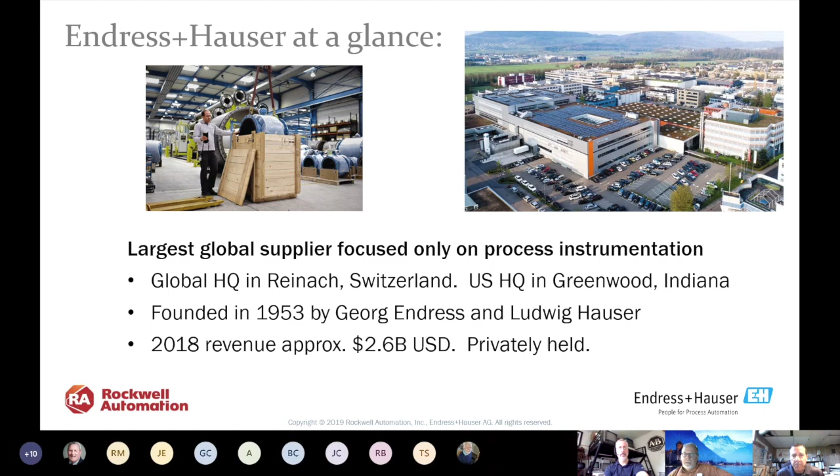So what is a strategic alliance? There's different levels of partnerships with Rockwell, and the alliance partnership is a top tier partner, and we're not really here to just sell product through the Rockwell distribution. We are still representatives, but basically the alliance is to bring together two corporations that can build off each other and use the capabilities of one another to broaden their offerings to the market. And really that involves process solution capabilities.

Endress+Hauser is a manufacturer primarily of process instrumentation, and Rockwell does not really manufacture process instrumentation. So the two of us together can offer a system solution, and that's really where the alliance partnership is driven.

A lot of it has to do with system integration and the benefits that we bring to you by working together before you actually purchase the system. And it's basically done to deliver more value to the customer.

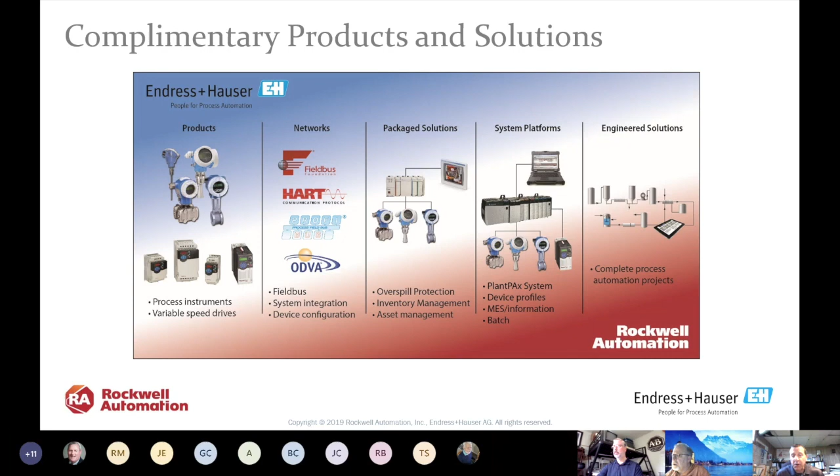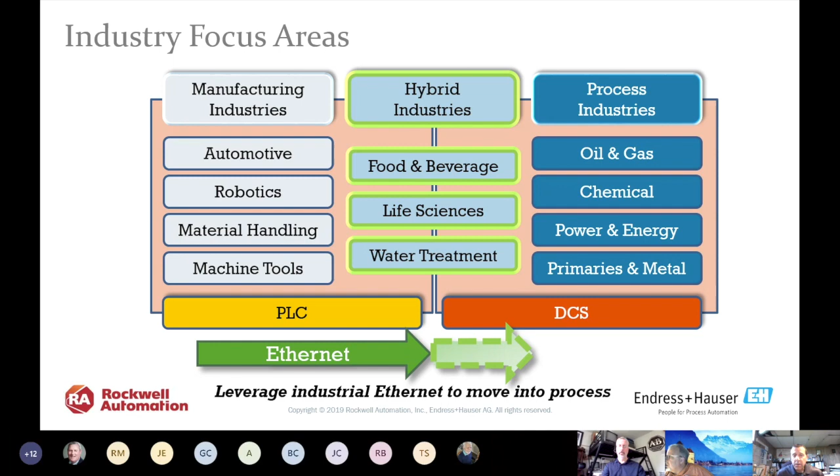Some of the key benefits. A lot of the integration is all pre-engineered, pre-tested. We work together with Rockwell well ahead of the release of instruments with things like EtherNet/IP. So working together gives us a much faster time to market. It really decreases the risk to the customer. Allows for seamless integration. It basically allows you to plug in and build a digital enterprise very quickly.

Gives you a lot of time savings on integration and cost savings because of reduced time spent in the field getting things started up. So all the things that you need, faceplates, add-on profiles, these things are all built and tested prior to the instruments being released. So today, on the EtherNet/IP platform, we're still limited primarily to the 4-wire devices, the powered devices.

And these on the Endress+Hauser side include magnetic flow meters, Coriolis flow meters. We're just releasing the thermal mass meter with EtherNet/IP. On the analysis side, our liquid analyzers. The Liquiline product line is EtherNet/IP capable, and that allows you to plug in a whole variety of analytical sensors. And then we have some other devices that are currently EtherNet/IP capable, and that's some digital recorders and things like that.

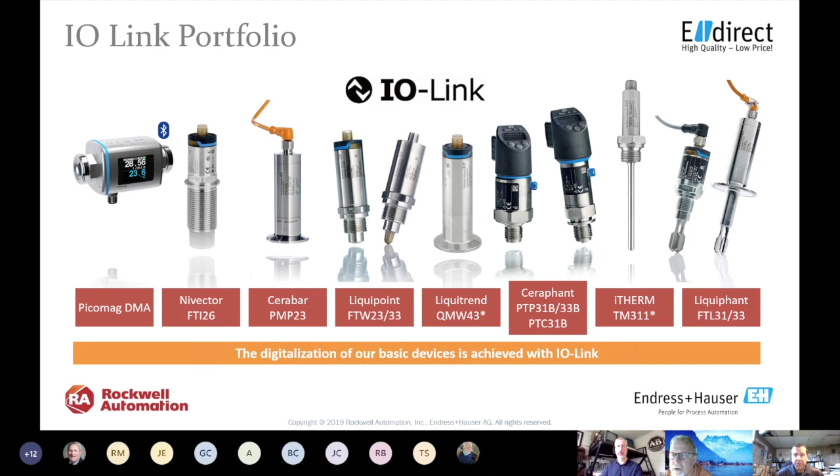E+H is also pretty strong in IO-Link, and that's just a platform that we see with some of our, I don't want to say lower cost, but simplified instrumentation. Some people are looking to IO-Link to digitize their automation side.

One other thing we do together is what's called a process training unit, and these exist throughout the country. Right now, we do not have one in upstate New York, but the plan is to have one in the next year and a half or so. It'll be in the Albany area. And these are basically training centers that contain just about every instrument that Endress+Hauser manufactures, and everything is live, and the whole system is controlled by a Rockwell PlantPAx.

So people across the country have used these not only for instrumentation training, but also for Rockwell training, where you can come in and do things live and see how the changes you've made on the control system are affected right there in the process. So these are all live training units. Everything contains water, but you're able to manipulate, break down instruments, and do the same thing with the control system.

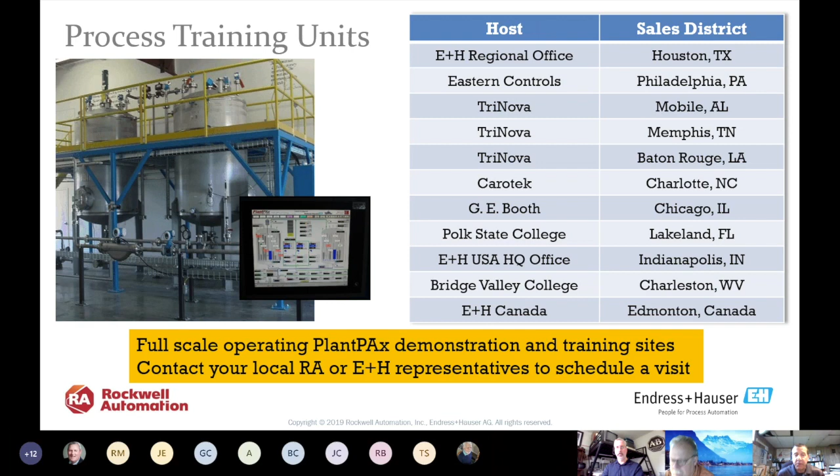So these are located throughout the country. Again, right now, the closest one is probably Philadelphia, but the hometown in Greenwood, Indiana is an easy jump on a plane. And that's actually the biggest one right now. And then eventually we'll have the one in Albany, New York for upstate New York and New England.

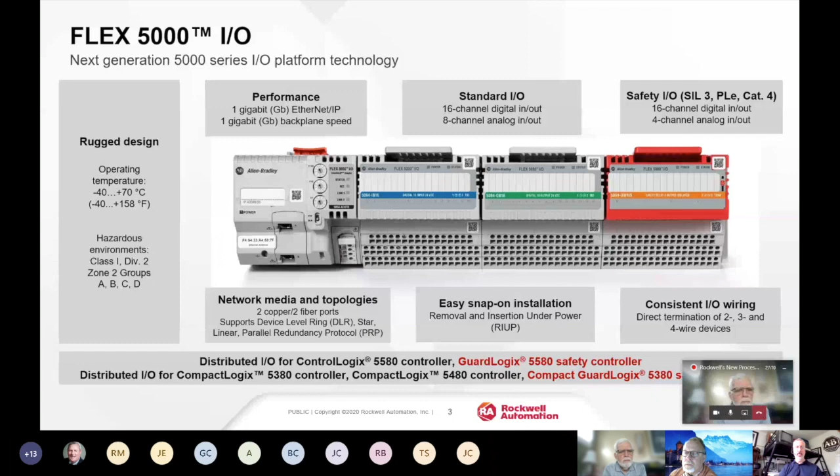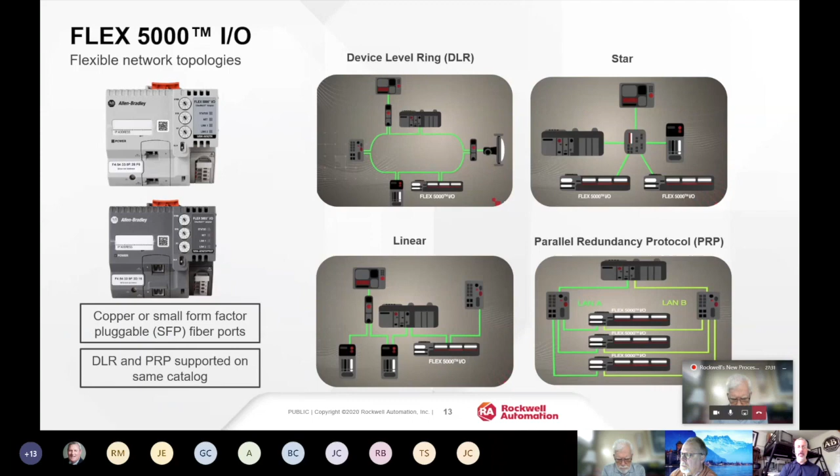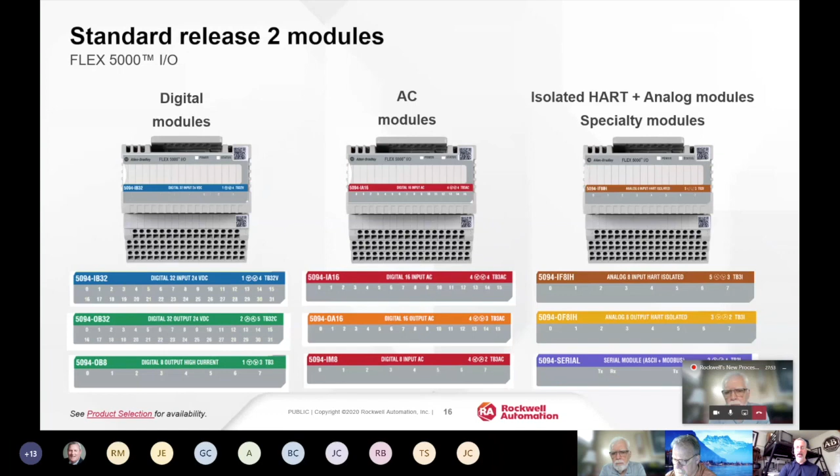And it's got a lot of flexibility about how you wire the thing up with what kinds of network architectures, from simplex all the way up through parallel redundant paths of Ethernet. So it should be able to fill just about anybody's needs for a highly available, super high throughput, very capable I/O platform. And again, handles digital, analog, as well as safety modules. The ones shown on the right here with the H at the end, the IF8IH and the OF8IH, are HART-based analog modules. You don't have to use the HART capabilities, but we'll be talking a bit about what comes from doing so. And if we look specifically at them, these modules have a new capability that we're calling HIH, or highly integrated HART.

Again, recognizing that in new applications, wherever possible, I'd love to see you folks taking advantage of Endress+Hauser's EtherNet/IP-based instrumentation. It's incredibly fast, high throughput, very flexible, lots of information made available with very little work to do. But again, recognizing that there's a lot of applications that use 4 to 20 milliamp devices, and that most of those 4 to 20 milliamp devices probably have HART built in, at least for initial commissioning, and maybe that HART capability is being ignored after the fact.

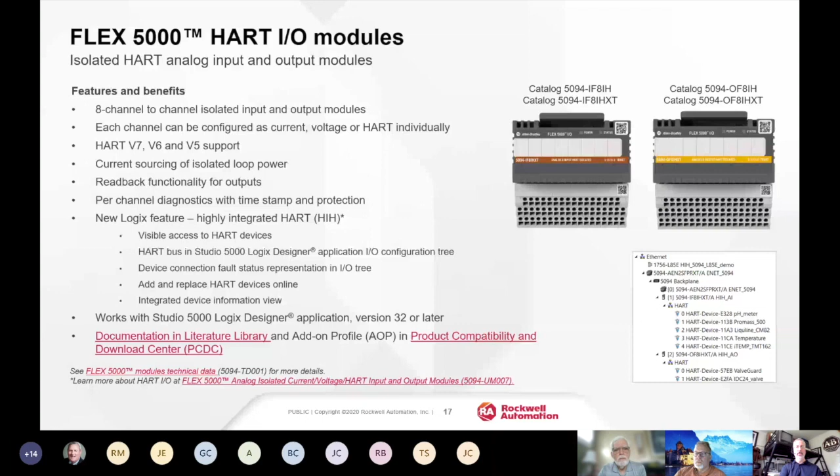Here we can be hooking up the analog modules, 4 to 20 milliamp analog, going to those devices, but also take advantage of the HART digital communications that exist on many of those existing field instruments. And some of what you'll see then, as shown on the right, is that now we have the ability in the I/O tree of our editing software for the processors, Studio 5000, to be able to drill down into the actual channels of HART instruments and to be able to see the devices that exist on those networks and to get a little more information out of them. This is our first release, so it's not complete, but it's got some pretty neat capabilities already in release 1.

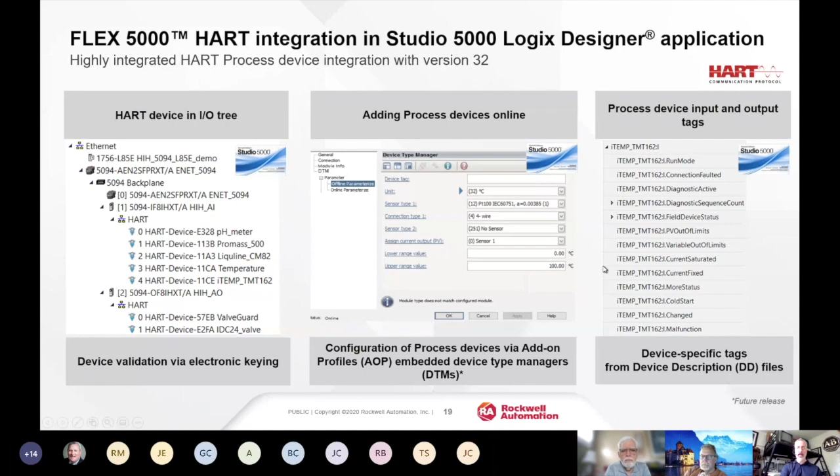An example of this is that if you look in the I/O tree of the processor, now you'll be able to see as you drill down into a Flex I/O module and into a particular point that you're going to be getting not just the standard data, but I'm also going to be able to drill down a little deeper and see information about the channels, the alarms that are associated with them, additional information about those HART devices. So again, as shown here, we're able to drill down in our I/O tree, see not just the I/O channels and cards, but also the devices that sit on HART that are connected to those channels, and to be able to configure them in many cases in ways that are powerful and be able to see their diagnostics and extended information. So that's the piece about highly integrated HART.

And then I also have just a few slides on the new PlantPAX 5.0 system that I'm going to be demonstrating here in a moment. And this is a huge investment from Rockwell in really extending what we've been doing for the last 10 years with PlantPAX, building a characterized high-performance process control system using relatively standard pieces and parts in the Rockwell portfolio, our ControlLogix and CompactLogix processors, our I/O devices, our FactoryTalk View ME and SE HMIs, and moving that forward now into an even more tightly integrated system.

We have our process object library we've had for the last 10 years of add-on instructions in the controller and corresponding faceplates and graphics in the HMI that provide a very powerful user-rich environment that helps comply with industry standards like ISA 18.2 for alarm management, ISA 101 for high performance graphics, where we're not overloading the operator with information that they don't need to see. But here we've taken this now even a step further and baked a lot of those kinds of capabilities directly into the controller. We've come up with some new hardware. We're actually showing it here.

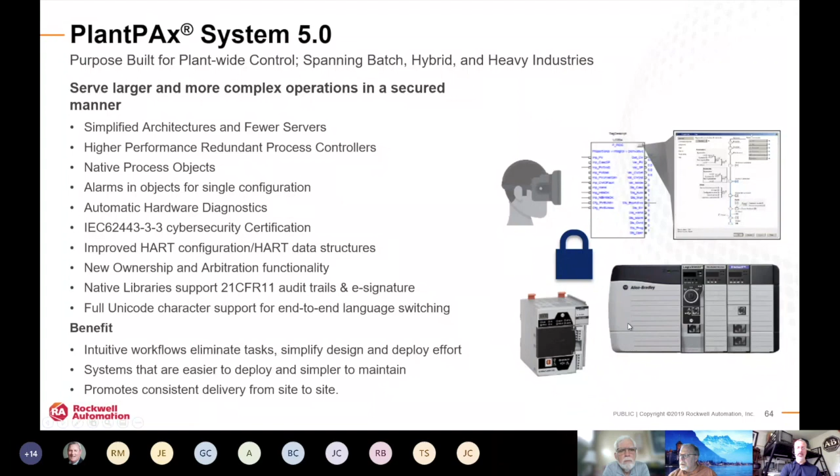A CompactLogix and a ControlLogix in a dark charcoal color, which indicates that these are process variations of our 5580 and 5380 processors with a P at the end of the catalog string that indicates that they're actual PlantPAX controllers. You've always used standard ControlLogix and CompactLogix in the past with PlantPAX. Now, if you like, you'll be able to buy specific processors with even greater functionality should you choose to use them. You can still use standard ControlLogix and CompactLogix, but you'll see some of the new capabilities when you move forward with this new set of processors, new variants of the processors that are that much more tightly integrated.

So some of the things we're trying to do with 5.0 are to make systems lower cost with reduced footprint, more consistency on how they get delivered to people, less opportunity for variation. It helps with the characterization and guaranteed performance. We want to make it as easy as possible to build these systems and to make sure that they're as secure and maintainable as possible.

So as I mentioned, in the CompactLogix family and in the ControlLogix family, we've just come up with some new variants that have process as their main focus. They're dark charcoal in color, and they'll have a P at the end of their catalog string. They're going to come in a couple of CompactLogix memory sizes and 3 sizes of ControlLogix. They've got some capabilities like guardrails, which may be a term you haven't heard before. The idea there is that there are diagnostic capabilities built into the firmware to be able to warn you if you haven't configured it following the rules of PlantPAX to provide the guaranteed performance.

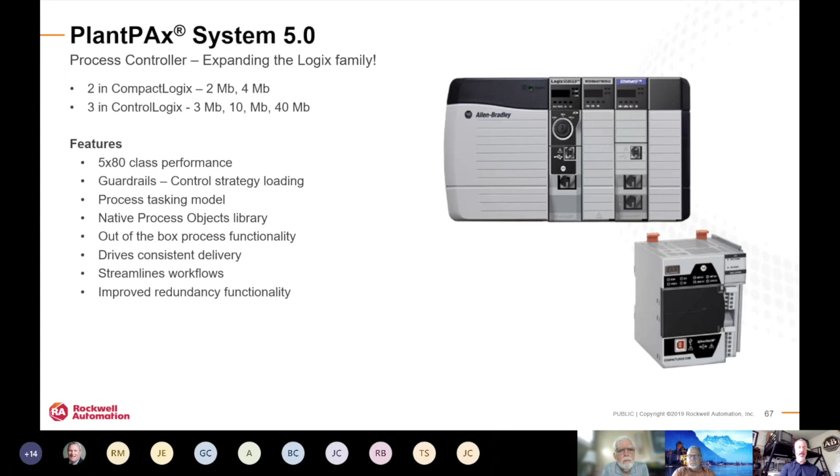If, for example, we said that you're allowed to have, I don't know what the number is going to end up being, but let's say it's 125 control loops per processor, and you put in 126, it would warn you that you may have poor performance or you're falling outside the bounds of normal operation by having put in a slightly higher amount of loops than what the controller is nominally designed to handle. So those kinds of things are built in.

Another huge step is that if you've used PlantPAX, we've had, as I mentioned before, built-in add-on instructions in our process object library. They start with P_AnalogInput, P_AnalogOutput, P_PID loops, that sort of stuff. Now these are baked into the controller firmware for these new processors as native instructions, and we'll see that in the demo in a moment. Should make your work a lot easier. You don't have to be bringing in these libraries from us. It's built into the firmware of the new processors.

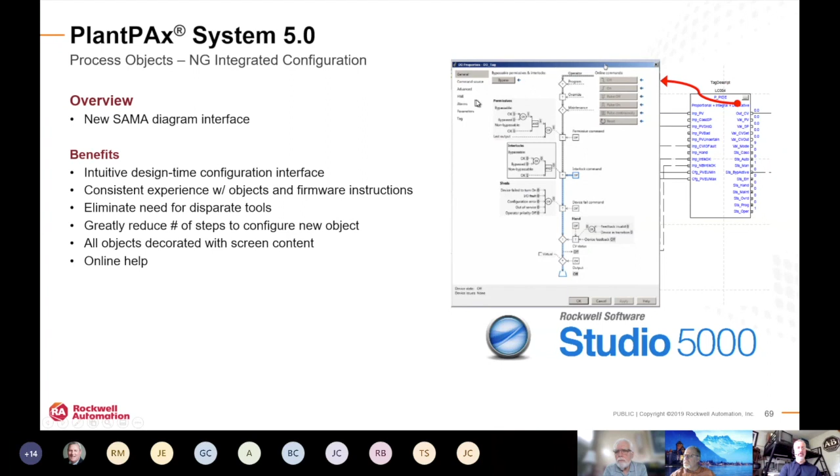Similarly, a lot of the faceplates where you would do configuration and maintenance inside of our HMI in a PlantPAX system in the past are now baked into these Studio 5000 instructions. So you can still get at them from the HMI, but you'll also be able to get at them very easily inside of Studio 5000. So hopefully that makes some sense. And again, we'll see that in the demo.

Another huge part of this is we've been adding capability to our process control, our CompactLogix and ControlLogix processors in the 5380 and 5580 families, to be able to essentially check a box in the tag browser in the controllers, to say that a tag is not just a tag, but it's also a FactoryTalk alarm and event. And you can configure what values would cause it to trip, what kinds of events would happen when it goes into alarm, and what area of your facility's alarm system it is associated with.

All of that now is built into these instructions in the controller and can easily be turned on and off, either manually or programmatically. So you don't have extra steps to configure alarms for the system other than just initially ticking the box that you want them and specifying perhaps what the high-high values and low values are.

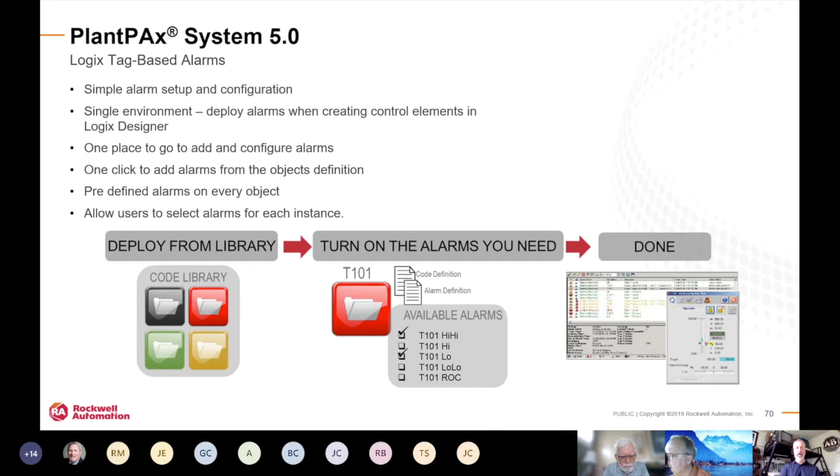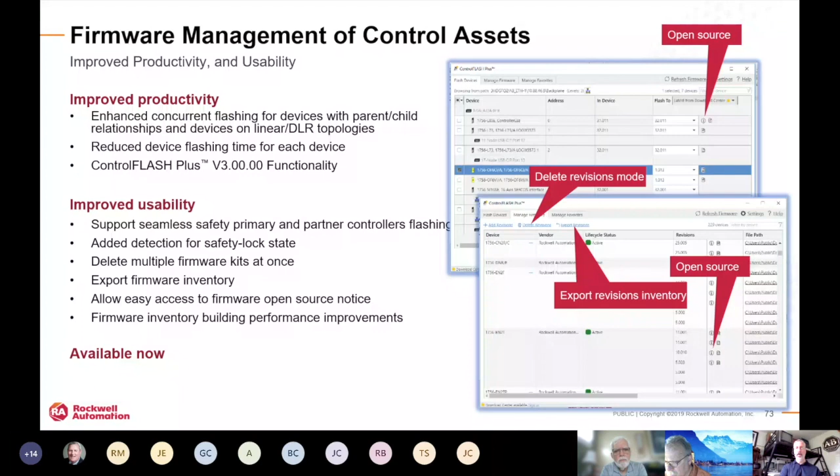Our networking has gotten more baked as well in terms of our system selection tools, Integrated Architecture Builder. We've improved, as I mentioned, with HART, the HART-based Flex 5000 modules, and we also have networking options, including parallel Ethernet segments that allow high levels of failover and capability to keep the system up and running. And we've added abilities to more easily flash the products to a consistent level that you've designed towards, and to make sure that you're aware when there might be anomalies in those firmware releases.

And that falls into maybe the last piece that I think is really critical: to keep these control systems viable in this new interconnected world, where we're seeing so many hackers now targeting control systems, there's an international standard. It used to be ISA 99. It's now called IEC 62443.

Now I'd love to actually dive in and show you a demo, that pre-release demo of this hardware and software that we're talking about. Fair enough. Any questions at the moment, Steve? Anything in chat I need to go through? Nothing that I see yet, Mike. Okay. So can you see my Windows desktop of my demo? I can. Okay. So I'm going to go full screen.

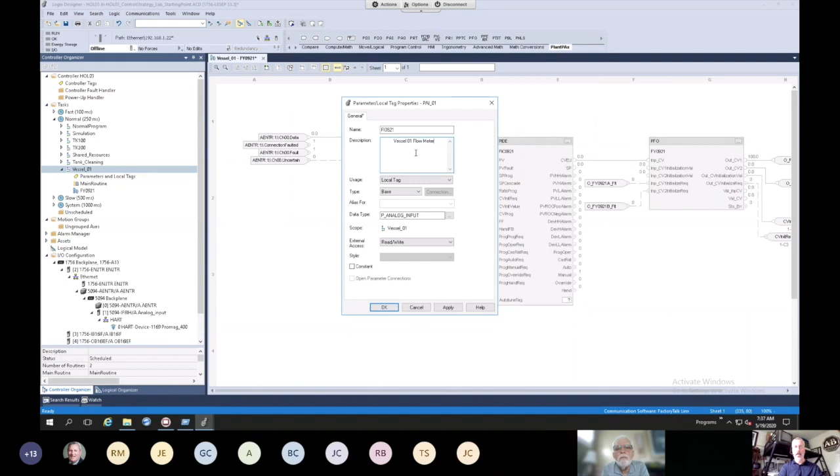All right, so the next thing that I would like to do is to rename this object, because if you notice, when we brought in this control strategy, they didn't come renamed with the instrument names that we want to use. In this case, PAI_01 is not a really useful name. So what I would normally do is come in here and rename this thing to be my flow indicator, in this case the 0921 flow indicator. And it probably would make sense to type in here that this is the vessel 01 flow meter, and I could apply those changes and close.

And now we should see that this particular analog input scaling block has the name that matches the instrument in hopefully our piping and instrument diagrams. Okay. So what do we want to do next?

Let's take another look at, let's say we've added in this analog input scaling and handling block. Again, with this process instruction with these ellipses we have here, we can bring up a dialog box. We'd gone before to the parameters tab and added some more nodes to wire up to on the left and right.

But if you notice, there's other tabs on here, and these should match up very nicely with what we used to have to see inside of our HMI, where we have a SAMA diagram, an industry standard view of the flow of data from the input from our instrument through the scaling, through virtualization, where, for example, if you want to simulate the input because we're testing before we've commissioned it, or if I have a bad instrument and I need to temporarily manually type in values that I'm collecting from the machine so that I can continue to limp along, I could use this substitution value.

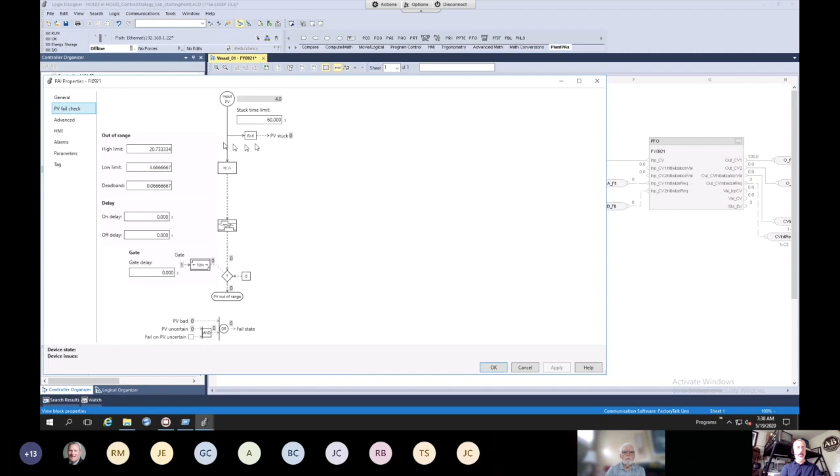There's built-in filtering for the input to make it nice and smooth. And with appropriate security, you can modify these values from right here inside Studio 5000. You can still do it in the faceplates inside of the HMI, but you can do it here as well. There's another tab for the PV fail check if you want to deal with things that are out of range. And another tab here on advanced to handle what we do when certain things aren't quite in normal operating status. There's HMI information if you want to pass along back to the control system.

What part of the machine is this in from a security standpoint, so that only the correct operators for that portion of the plant have access to be able to modify these things. Again, FactoryTalk Alarms and Events are built in, so you can configure, tick the box to say whether I'm going to have alarms for high and high and low status, rate of change alarms, all that sort of stuff. So that's kind of neat. Again, built into the controller, very little you have to do now to set up a full functioning system.

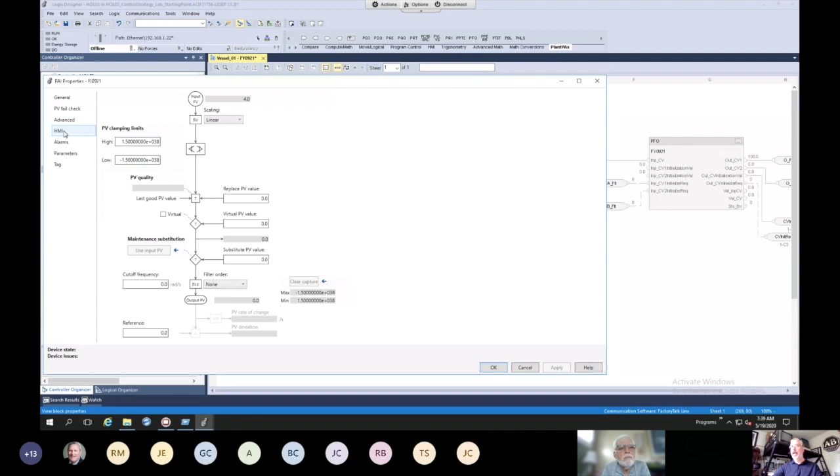Next, well, let me go back in there. A couple more things that are probably worth noting that I don't want to gloss over. On the HMI tab, you could certainly tell this thing what particular library it is participating with. So for the library of HMI objects that are going to pop up, which set of those do we want to use? Which particular type of instruction is this, so that the HMI knows what HMI object to pop up?

You could give it a label and say, all right, this is a flow meter. You could tell it that it's in area 01 of the plant, and you could put in the engineering units, the scaling that you're going to be displaying the numbers in. So on the HMI, it will come up and show you that I've got cubic meters per hour of flow with raw units of milliamps that we're reading out of this 4 to 20 milliamp instrument. So you could click on that sort of thing.

Another thing that's kind of interesting is if I go to the alarms area, I could configure that I want to have a high-high alarm, and specify the value that would cause it to go into alarm. Maybe the limit is going to be, I don't know, 2,800 cubic meters per hour of flow would be a high alarm. There's also a button here with ellipses where I can go into more detail, and I can type in a message for the particular type of alarm. I can modify the value. I can click this button to say that I want to actually use this particular alarm in my control system.

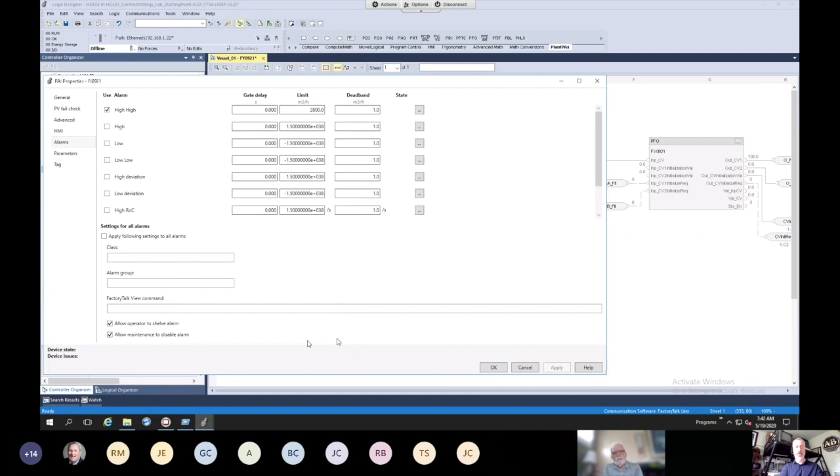If I were to do that, I might put in that the type of alarm is analog input. So I could do some filtering in my alarm banner later on in my HMI to look for any alarms related to analog inputs. And I could also specify that this is related to vessel 01. So now any of the alarms associated with this analog input are going to be filterable and sortable, and looking at this one that had been empty before, it now shows that all these high and low alarms are associated with vessel 01. So if I want to filter my operator's alarm banner to just vessel 01, these would show up in there. That makes sense so far?

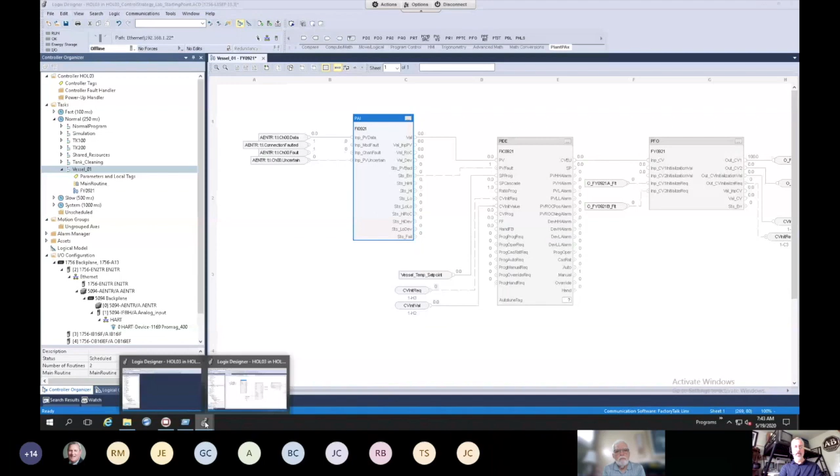All right, moving on. What I'd like to do is move over and actually show this thing online. So let's go online with my controller. Again, there's one of these pre-release ControlLogix process controllers, PlantPAx process controllers, in Milwaukee that we're connecting to. And we just successfully went online. The processor is in run mode. Okay, a few things to note here.

One of them is that while this processor is in Milwaukee and we're online with it, the actual I/O that it's configured for is not set up out there. So it's got some yellow warning symbols here to indicate that. But I think it's still useful to show that stuff is in the I/O tree, that our code is associated with it. And when you're able to commission those I/O devices, bring them online and connect them to the network, they would start to populate and flow through properly, working the way that we want.

So let's flip over briefly to the operator interface. And here's just a very simple process graphic that someone has created that shows that I've got my vessel 01 and we've got a flow meter that's set up here. This object here, this symbol, I'm going to call it a widget, is something that you may be familiar with from our process object library, that we've had these for a long time. They could have little thumbnail trends. They could have kind of a gauge indication, or it could just be numeric as shown here.

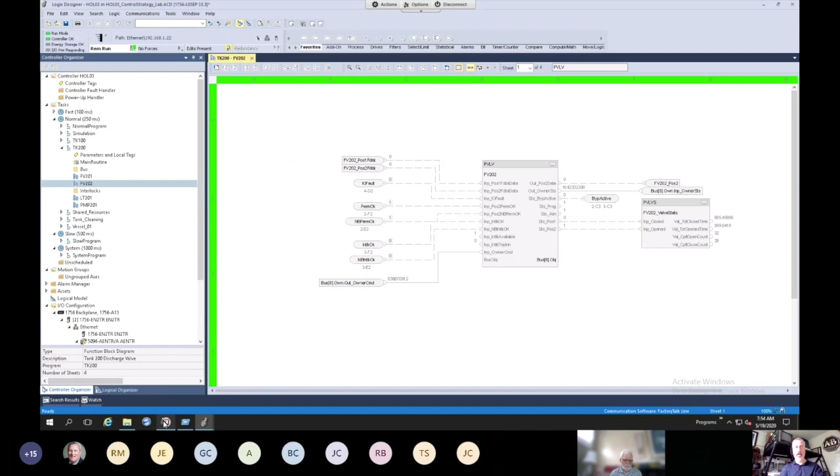If I look at this particular control strategy that was created by somebody else, there's an object down here at the bottom called bus object. And this is an array of objects, a grouping of control elements that are going to be all grouped together into one unit that we can start to manage as a whole unit instead of a collection of pieces and parts. And to kind of finish up this exercise and demo, I'd like to quickly show what that means.

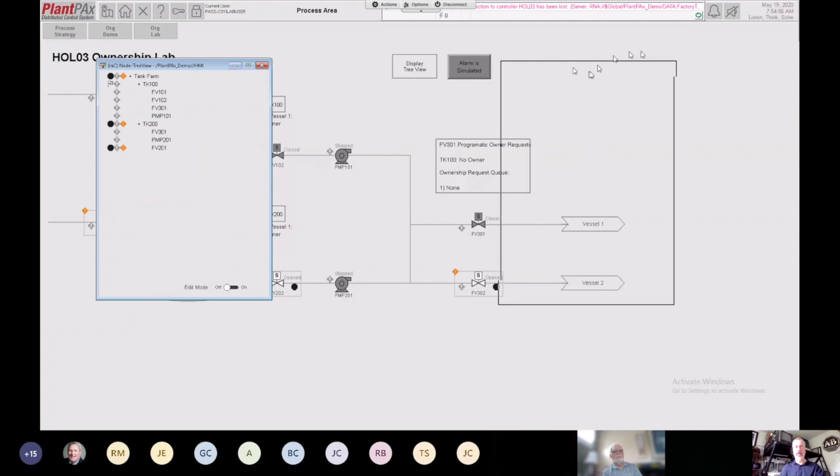So if I were to come over to this particular process diagram, you can see there's multiple pieces of equipment, a TK100 train, a TK200 train, and there's now this concept of ownership and arbitration. If I look in here, you'll see that I've got a tank farm, and I've got the ability to expand this into the TK100 and TK200 views of these particular instruments. So in this case, I got my flow meters, my pump, my output device, if you will.

And if we wanted to add another device to here, we can come to edit mode and be able to now come to a container and click on here, in this case, the TK200, and add a child. Maybe I want to add that new device we added earlier, or maybe another one. Let me just close out of here. There's one here with a question mark now that was just added, and I could come in here and rename this thing, and I could specify what he's associated with, and be able to use it effectively that way.

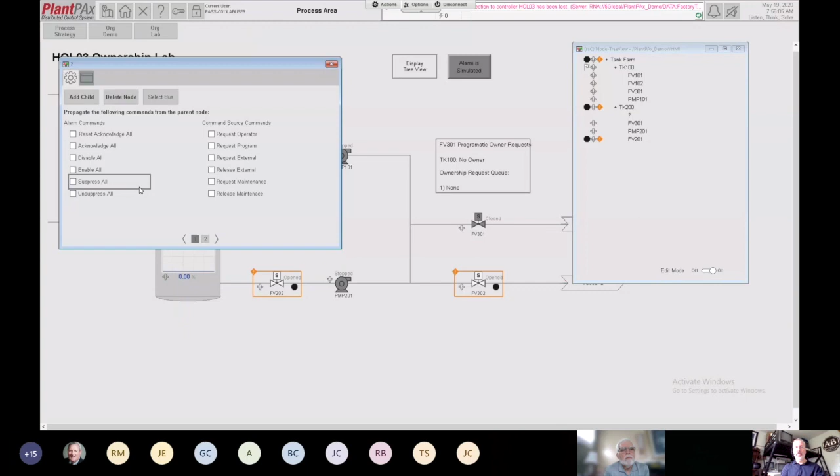So in any case, my point here is that now I've got an ability from an alarming standpoint to acknowledge all the alarms for a grouping of equipment, not just an individual device like a valve or a pump. I'd have the ability to change the mode for all of these from program mode to operator mode. In the past, I've had to go into each one of these objects and change it to operator mode if the PLC had been controlling it, and I now wanted the operator to take manual control.

So those kinds of capabilities now exist in this ownership and arbitration mode, and you can specify whether the PLC's program has higher priority than the operator or vice versa, so that maybe the operator shouldn't be able to take control when the program is trying to use it. But those kinds of capabilities exist. And that's basically it. So those are the three things I wanted to show inside of PlantPAx 5.0.